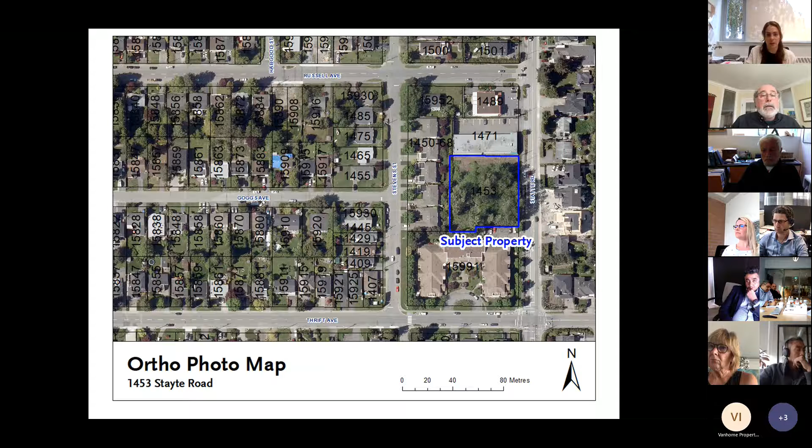So the purpose of this report is to present the ADP with a summary of revisions based on the feedback and suggestions that were received on July 20th, 2021. The proposed townhouse residential project is located at 1453 Stayte Road between North Bluff and Thrift. I'm just going to give you a very high level overview of the project because the applicant will be able to go into more detail in their presentation of the changes that have been made.

The lot area is about just over 34,000 square feet. The OCP designation is urban neighborhood. The rezoning being proposed is a CD zone. And the form and character DPA that we are focusing on today is multifamily development.

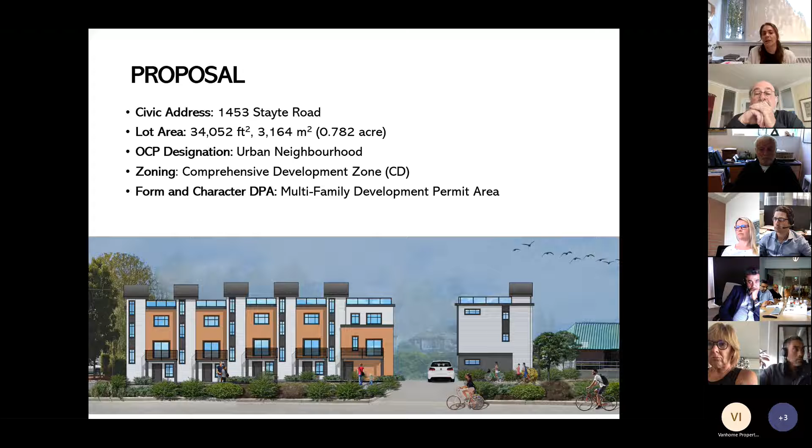So they made a number of revisions to the application, and as the chair alluded to, I summarized them in the memo to the committee. They did remove one unit to reduce the density. They did create an outdoor amenity area. They reconfigured the floor layout of block 2 of the site plan, so now there are 4 units in block 2, whereas previously there were 5. They also provided revised elevations and regenerated the shadow study.

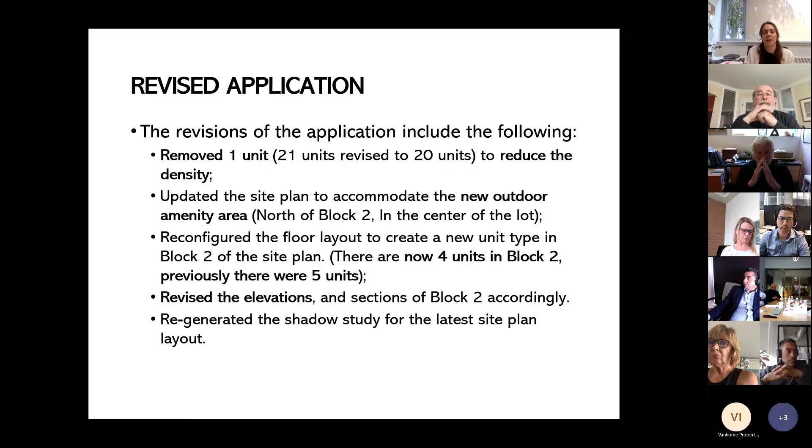So in terms of how this aligns with our policies, this property has an OCP land use designation of urban neighborhood, which is intended to build on the existing character of apartment areas, protecting the existing single-family home stock while providing opportunities for more low-scale multi-residential within walking distance of the town center as designated in our OCP. So potential developments in this area should strengthen nearby commercial uses and provide further transition from the town center to the lower town center. And the density allowed is up to 1.5 FAR.

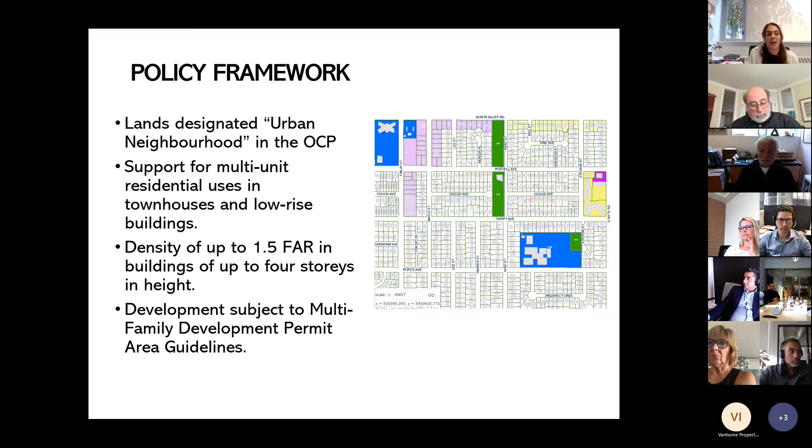So in terms of the design guidelines, the intent is to establish an attractive, comfortable, well-connected, pedestrian-oriented environment, ensure compatibility of new developments with adjacent buildings so it fits in with the current form and character of the neighborhood, enhance the overall quality of life of residents of White Rock, conserve energy and water and reduce GHG emissions, and enhance the character and built environment and public realm of the city.

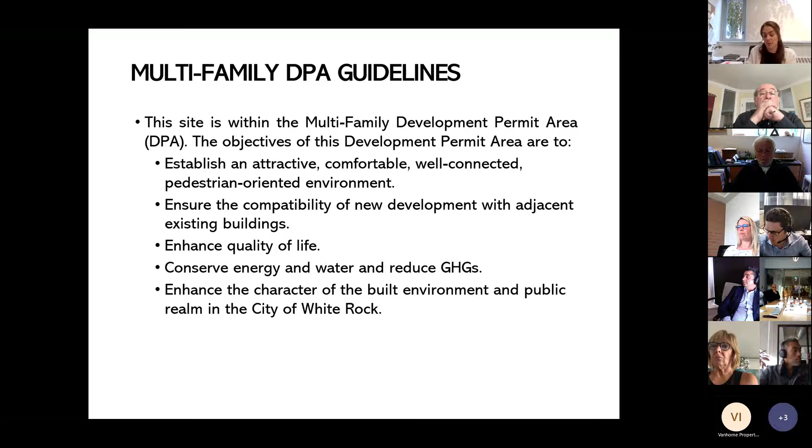So I'll give you an overview of the process. This went to a public information meeting on December 9th, 2020. The first time the ADP reviewed this was July 20th, 2021, and today will be the second review of the revised plan. The next step would be to go to the Land Use and Planning Committee.

At this time staff is looking for a recommendation of support based on the revisions. Staff feels that it does meet the intent of the design guidelines. That's where I'll leave my presentation, and I'm happy to answer any questions on the memo, or hand it over to the applicant.

Okay, are there any questions? I can't see everybody because of the screen share, that's all right. Is there anybody who has any questions for Alex? I have one, but I'll first see if anyone else does.

All right, I'll go. My question is, you say it's 1.5 FAR. Does this proposal before us today, the revised proposal, meet the 1.5 FAR? Through the chair, yes, it does.

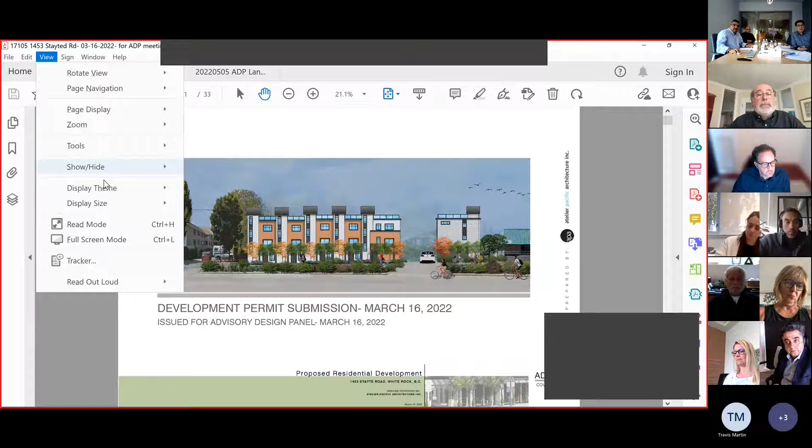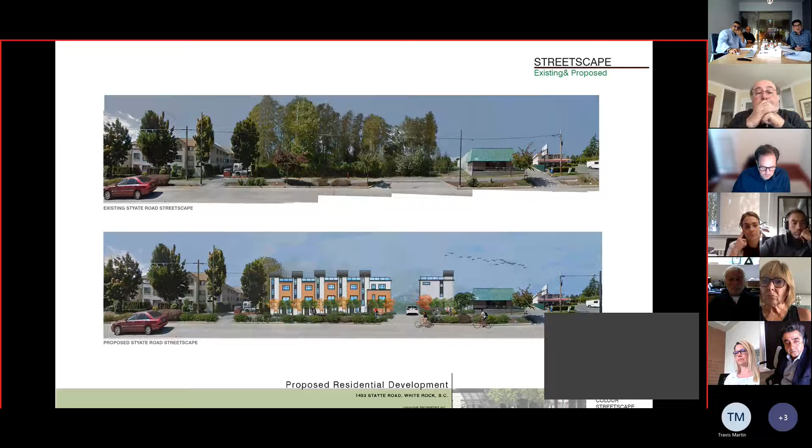Why don't we go to ADP 0.6? I think we'll just focus on the changes from the previous application, that would probably be the easiest thing to do. We did go from 21 units down to 20. I think it's... keep going... oh, back... there you go.

Okay, so I think there's a question around the FSR meeting the OCP requirement of 1.5. We're actually at 0.938. If you take the density relative to gross site, it's actually lower, 0.905. This project goes back quite a ways. It was originally a 4-story condominium building. At that time we were conforming with the proposed OCP and direction from some members of council who'd like to see an apartment project there. It was actually proposed at 50 units and 1.41, so this is substantially lower in density. Now we're down to 20 units and a density that's under 1.

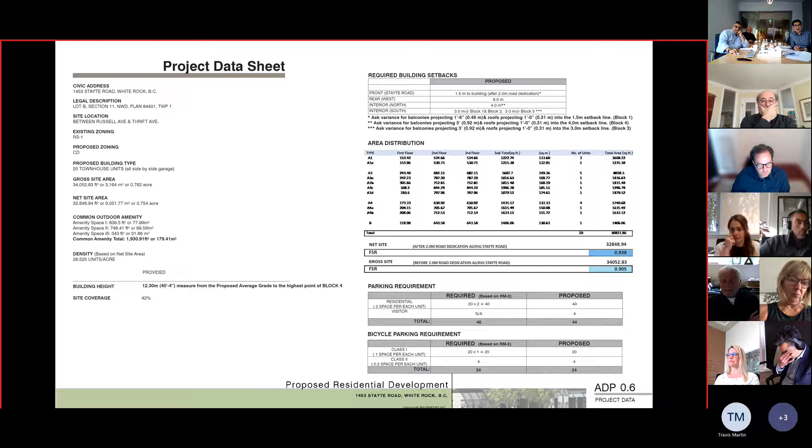That site plan there. So the big change from the last presentation is on block 2. It's gone from 5 units to 4 units, so 21 units down to 20.

I think the landscape architect can also talk about the addition of that green space in the center. We did have the green space on the northeast corner, but now we have a larger one situated in the center of the site. We still have the one in the northeast and northwest corner, so it's augmenting the amount of available outdoor space.

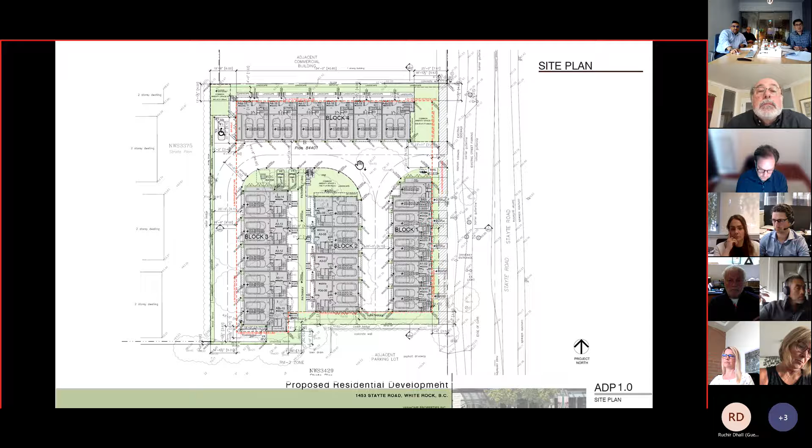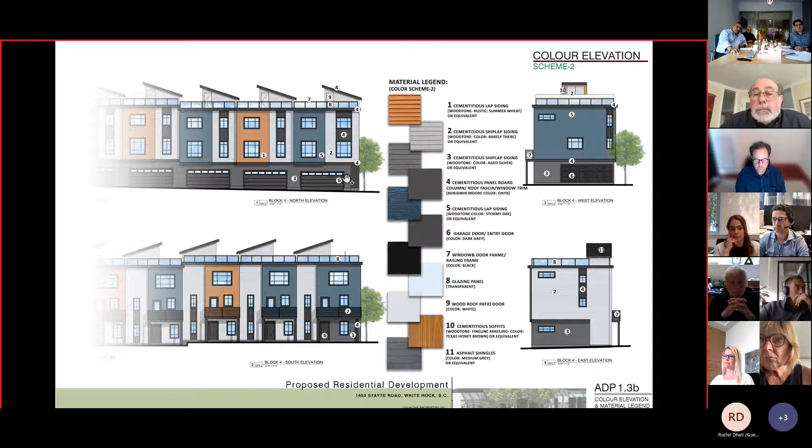Architecturally, the mass of block 2 has changed a little bit. By taking down 1 unit, they got a little bit wider, so it's a slightly different unit. The outside treatments haven't really changed. There was some discussion about increasing the usable roof area, so that's definitely a possibility.

In block 3, the neighbors to the west were looking at reducing the amount of outdoor space of the individual units by about half, and then providing a privacy screen, an acoustical barrier between the neighborhood and the units. That's how it was treated. I think in the last ADP discussion it was about expanding that space, so we can definitely do that, and then move the screen over and provide the acoustical barrier the neighborhood wants.

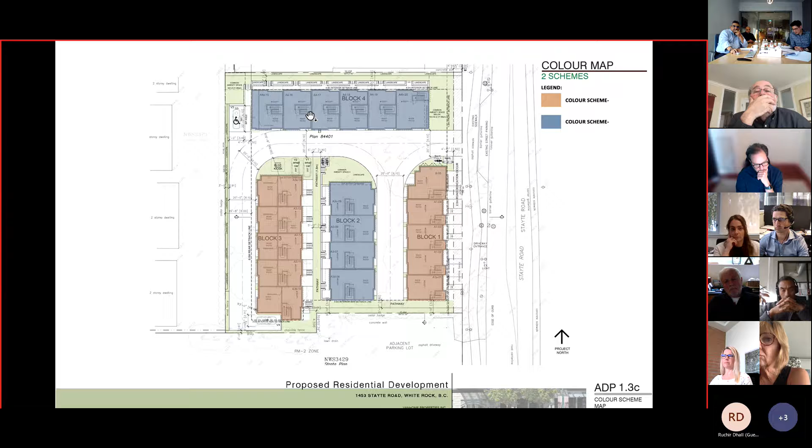That's pretty much it relative to what was done before. Travis, if you want to touch on the landscaping changes, we'll load up the landscape drawings for you. Sure thing. All right, thanks, Brian.

As noted, we now have 3 green spaces. The front corner amenity, which is basically the play area, we were asked to enclose, so we've added gates to that little space. We have the northwest corner seating node that was there before, and now that links down into this center green space node, so it's a bit more well connected through the project.

The entry driveway has this special paving, and that paving is also continued at the center node now, so it broadens the feeling of that space. With the reduction of that unit, we were able to add some seating for either people who want to hang out or just take some alone time.

We're also able to fit a larger tree. We have two focal trees, both pin oaks on the project, which will govern over the space and provide that central green feature. This is also where we have our bike parking and visitor parking at the end of this pedestrian walkway, which accesses the houses in blocks 2 and 3. So that's the big change in the middle of this site.

At the last meeting there were a couple questions, so I should clarify again. Along the frontage here, we're meeting the setback requirements. However, the road may be widened in the future, so we've ensured that all of our landscaping is sitting behind the potential new property line, which has a 2-meter takeaway on the front edge. We have fastigiate trees and layered planting there that'll provide a nice landscape base along the frontage.

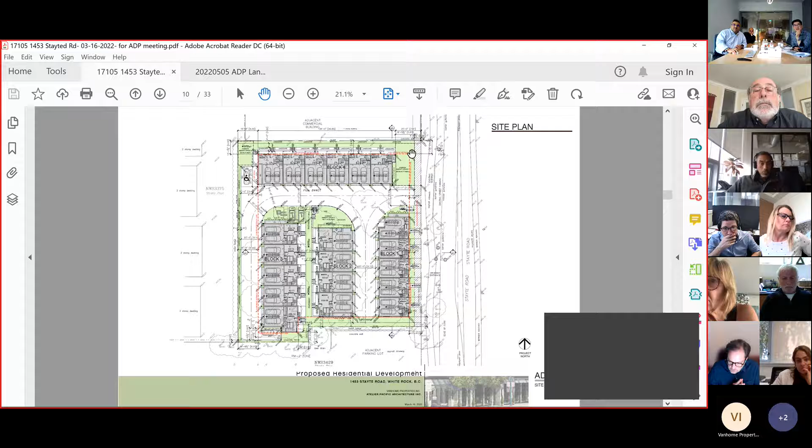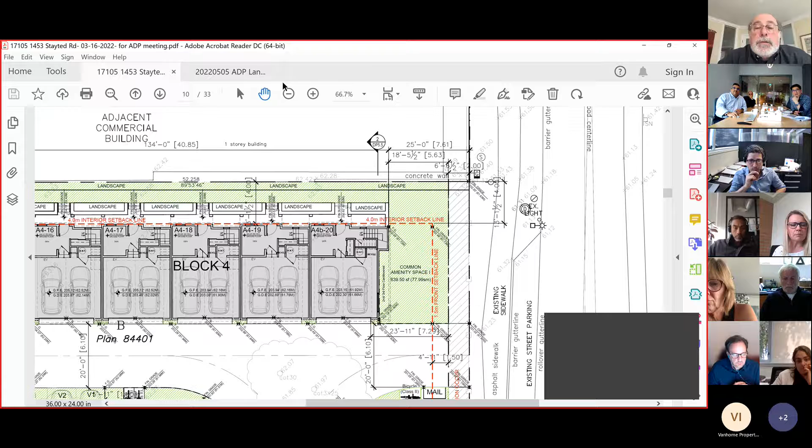Okay, so the road right of way, the 2 meters, goes to the red, or halfway to the red? Can you go to the architectural site plan? I believe that's correct. It goes to the red, the area that's hatched on our drawing. So you can see the front setback of 1.5 meters, and then the secondary middle dotted line is the right of way. I understood that on this design, but could you go back to the previous one? There, just for clarity, I don't know where the 2 meters is. The 2 meters include the red hatch. The diagonal hatched area is within that 2 meter zone. So the line aligns with the red dashed line.

Okay, I'm going to come back to that with a question, because we have a design with and without the right of way being used. Any other questions? Has Ruchir come back yet?

Could I ask, is there a way of seeing perhaps Alex or someone - I don't know if one of the staff members could email him and see if there's... I can send him an email. Okay, if you could do that, I'd appreciate it.

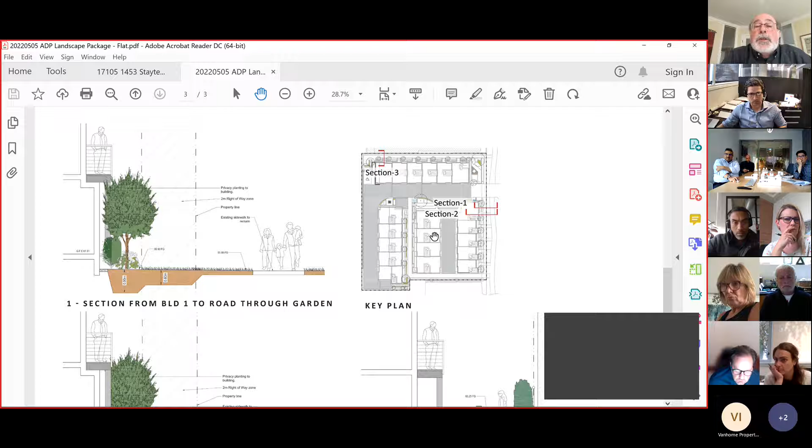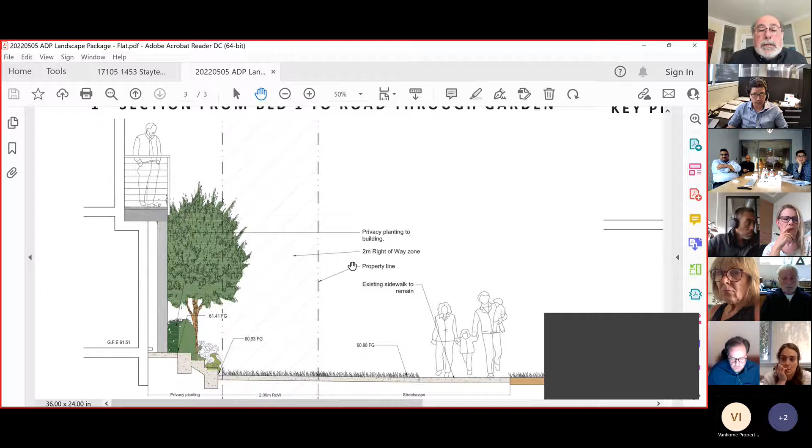Section 3 is the north property boundary. No, not the cross section - section 2, rather, section 2. That's it. So could you move that up a tiny bit? Section, so that we're all on the same page about... sorry, the reason I have my controls... that's much better, thank you.

So the property is the fence, and I've looked at this site several times. Is the fence that's there now on the property line?

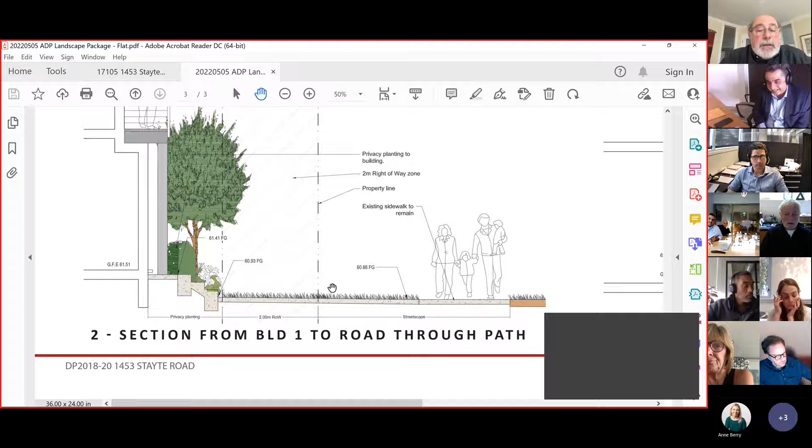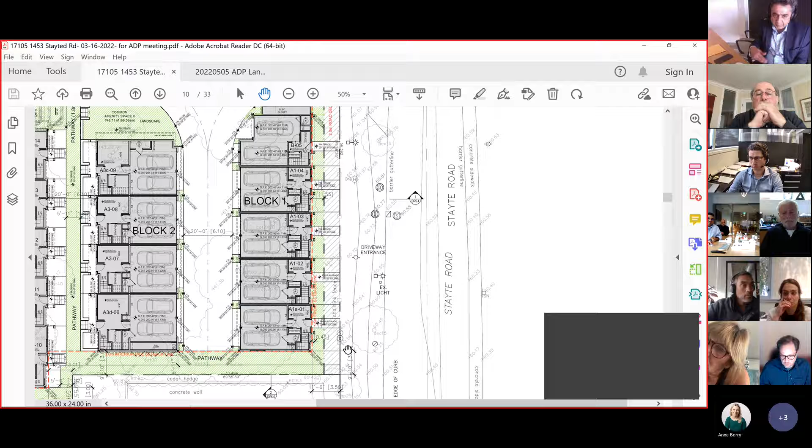I have one question, and if you could lead me to the site plan, especially if you do have an off-site site plan - we had a little concern last time with that. On Stayte Road, there's an elaborate boulevard and some existing inset parallel parking spots, etc. Last time it appeared that civil input was not available - actually we did not know how the outside of the site is going to look. I was just looking forward to seeing if we had more information this time, where the curb, the boulevard, the planting, the sidewalk, everything, where the fencing is, all that stuff, and what kind of planting, hedging, etc. is towards Stayte Road.

Sorry, unfortunately I didn't prepare for that. There are civil drawings - the client could probably speak to that as well. It's part of the offsite servicing agreement, which includes curbs, sidewalks, and that sort of thing, but I don't know if we can access our server to get that drawing.

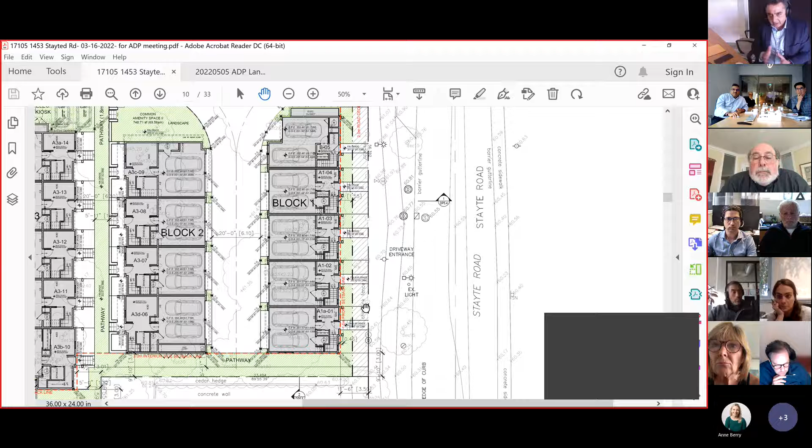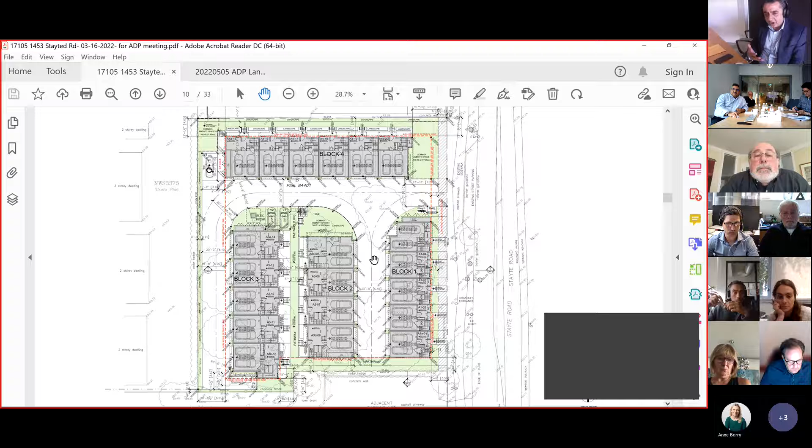Okay, I just wanted to basically get a feel of how the development is going to look from the outside - the treatment, the interface. Is there going to be a shrub, a sandwiched fence? What is it going to be? What kind of trees, what profile of the curb, etc.? I believe we talked about it in the last presentation as well, and I was looking through the package to see if we got more information. In your rendering, from the front you see a bunch of shrubs and stuff, but I'd like to know more how the project looks from the outside.

Yeah, unfortunately, I can't access it.

I think that curb path, the multi-purpose path, because if you see the path where your cursor is, it doesn't look like a civil kind of layout. It's irregular. It probably seems to be either an existing asphalt profile or something. I don't see where the boulevard, the parallel parking spots on Stayte Road, the way they are, etc. So if you can continue looking for it while we work through the presentation, maybe that's a good idea.

And this is also just building on that, and I think maybe the question is to Alex or Anne. Is there a development standard or a future cross-section that Stayte Road is aspiring to? Because right now it looks a little bit fictional, or it's really predicated on Stayte Road not meeting its full development potential. So does the city of White Rock have a cross-section that we can refer to? Will there be bike lanes, for example, parking? What is this particular road classification, and what would it yield in terms of cross-section?

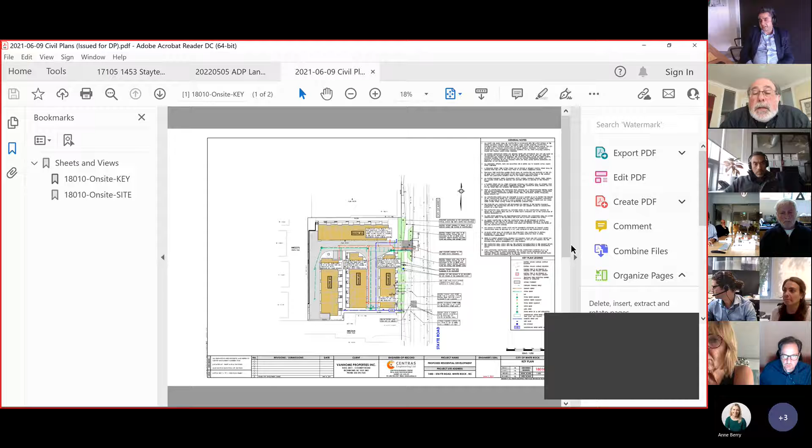Are you? Is that your? You can see the. Can you see those drawings? Yeah, you can just go to Google and Google Maps and 1453 Stayte Road, and yeah. So we've got the civil drawings for you. Sure. So I don't know if you can see the screen now. Yes, thank you.

So this is the existing condition with the existing sort of wavering asphalt which is going across, which is a sidewalk, which I think is a multi-purpose one. I can even open up Google and maybe share that for you. Yeah, that'll be great, because I see a rollover curb and a parking in front there.

There's an indentation for about 2 parking spots now on Stayte Road. Yes. That would, if there's no widening of the road, in other words, then those parking spots would be lost.

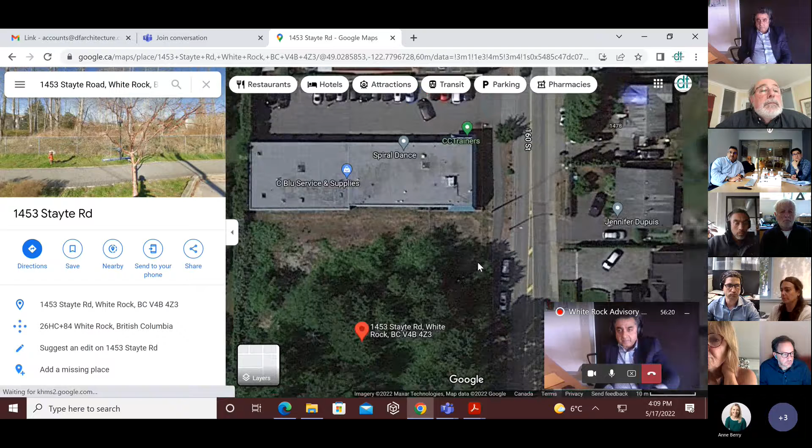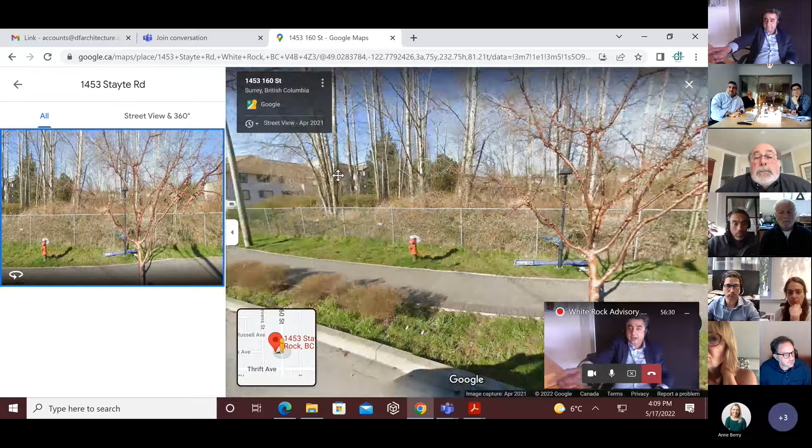Yes, if you can go on that image, just the image on the left. Okay, that's right, so you can see this. That's the one. If you just scroll a little bit, other side. That's what we're talking about. Yes, and that's where the entrance would be to the driveway in. Correct.

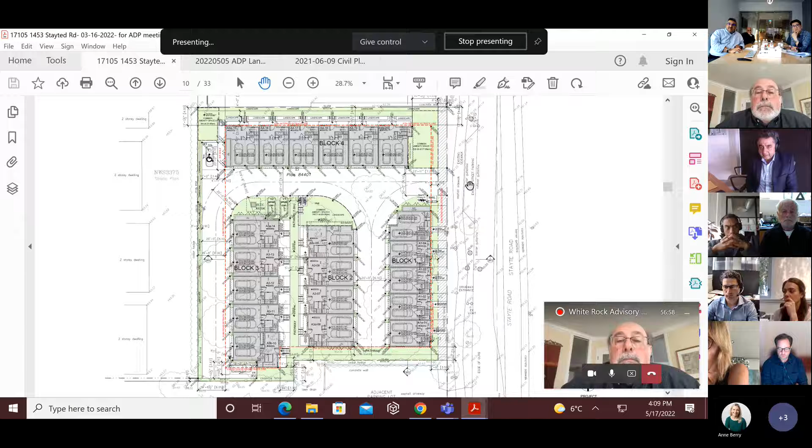So if you see this, Rucha, just to get you an idea, what we've done is, in our architecture, you see this is the lay-by. This is the 2 parking stalls here. Yes, and it's going to be eliminated to give an entrance to the development.

Sure, so basically that would be revised later on. But right now that's the current condition, and we will be taking an entrance over there. So I don't think these offsite parkings would remain in the future. Sure. Okay, and if we can quickly bring on your screen the civil layout once again, which you just showed.

So that's what he says: existing parking layout lay-by to be removed, install topsoil and sod boulevard. Is there another profile in which the curb profile going south is shown? Not really, no, not really. Okay.

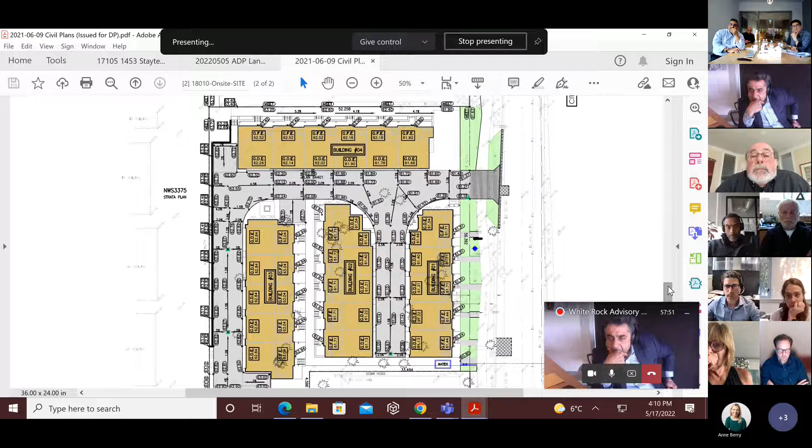There were comments about what this road is classified as, and it's classified as an arterial road. And through the rezoning process, we would refer out to engineering, and this would be something that they would deal with at that point through their works and services agreement.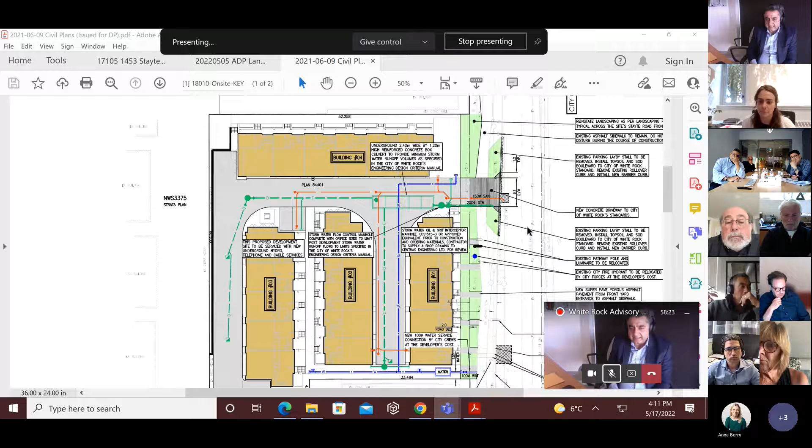I would propose if we let Travis talk about what he's proposing in terms of where the yards end, where it meets the boulevard, where the asphalt sidewalk meanders and all that stuff. Yeah, is there any planting, hedging, etc. and how is the treatment of the property edge handled?

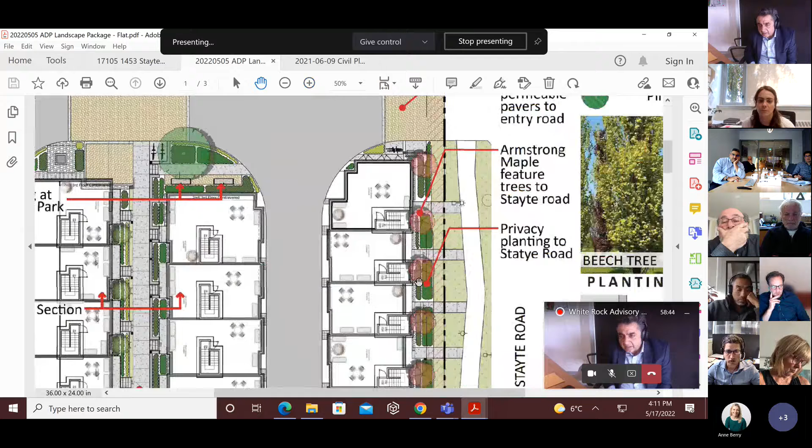I think it's important to realize that right now we seem to be planning for the existing condition, which is that this multi-use path stays in place and the boulevard stays in place and gets expanded around the driveway entry. But my understanding is, correct me if I'm wrong, that it's possible this road will be widened in the future, which is why we have this 2-meter wide right-of-way shown in that diagonal red hatch. So we're planning to have 2 layers of planting along the front of the building, a lower layer and a back layer of evergreens to give a nice landscape treatment to the front, and also have our trees planted within the 1.5 meter remaining frontage when that would happen. At this point, we have a 3.5 meter setback from the property line to the building face.

Brian, I'm not sure if you have anything you'd like to add to this.

We have pathway connections to individual units going into the multi-purpose path, but I suspect eventually, if the road does get widened, it'll be just a straight municipal sidewalk running along where the service right-of-way would currently be.

Sorry, because of where your mic is located, I didn't understand the last few words. Could you show with the pointer, with your cursor, where the right of way is? I know it's the 2 meters right there, right there.

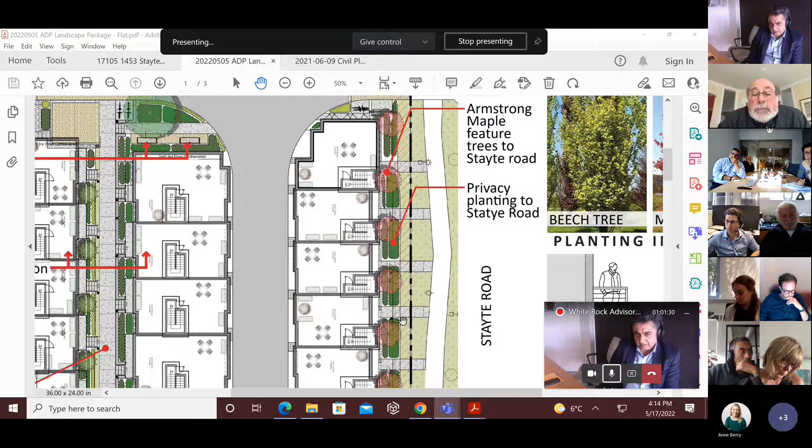Yeah, still a little unclear how that treatment is going to be. For the time being, is there a fence proposed there, or?

I think, Rashir, did you miss this part of the presentation? Please switch to the next page, one after - possibly one page over. We have a section, sorry, the 3rd page, one more down, that shows the frontage here. Essentially, in these 2 on the left, you can see we have 1.5 meters with 2 rows of planting along the building face, and then the 2 meter right-of-way there - it could be back boulevard which could be planted, or it may be a public sidewalk, all determined by the City of White Rock in the future.

Yeah, I see that, okay, thank you. So basically nothing has been thought about how the treatment of the interface is going to be, deferring to the right-of-way situation, which is unclear at this time.

Okay, thank you. A quick question to the city: is there a type of treatment - the planting, the boulevard trees, etc. - that we have standards on, especially when we have multiple yards opening onto street-facing units like this one? Because we don't see any trees or anything, or what the spacing or species of those trees are going to be.

Through the chair, I can't speak to species in detail, but we do have tree planting specifications, and everything would be done under the guidance of our city's arborist.

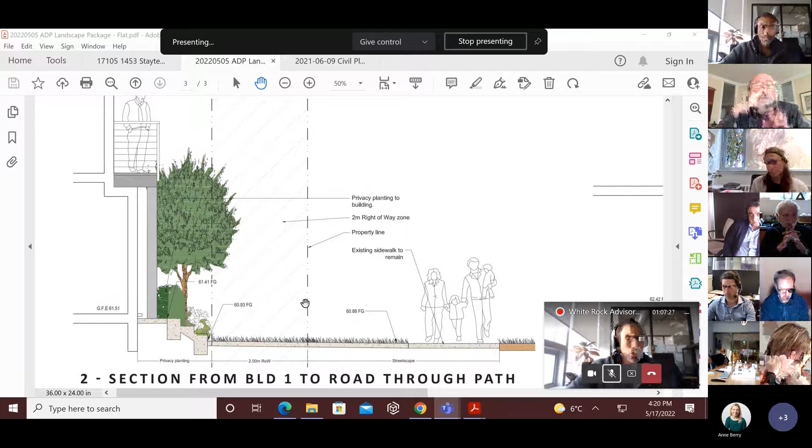Yeah, thanks, and I assume it's on this topic. It is. It's not really a question, just to throw in a few words. I think some of the complexity with this particular arterial, if I'm not mistaken, is it's the demising arterial between Surrey and White Rock, right? So typically when we're looking at jurisdictions or roadways within singular jurisdictions, it's more straightforward in terms of development standards. Here I can understand it's going to take cooperation between municipalities, which is probably leading to some of this ambiguity in development plans for that road. Just an observation, thank you.

Paul? Yeah, I just wondered about what kind of tree you'd be planting in that little setback. What is it, just over a meter?

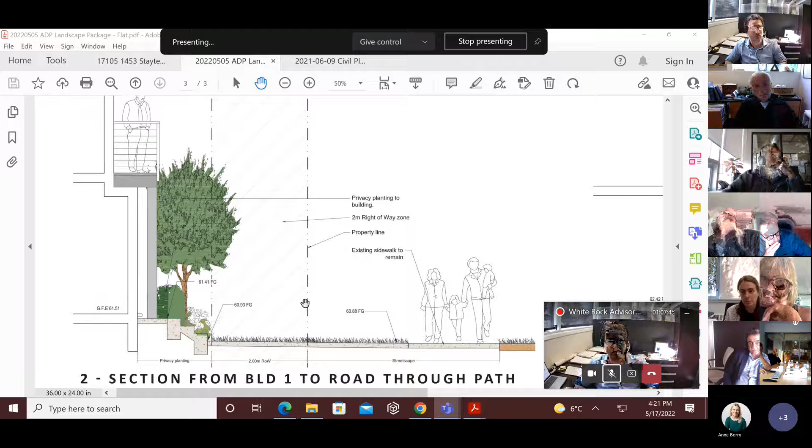Yeah, so we're planning on Acer Armstrong. And how big do they get? They're quite narrow, tall and fastigiate - more narrow than this kind, more long and tall. They'll get 20 feet tall, and a tree that's very old will possibly have a 10-foot diameter, but generally it takes a while to get there. Due to their structure, you could easily be limbing out branches to give it the shape you're looking for as it grows over time. Even just next to my building here, I see it on the street - it's very common to thin out the trees as necessary, but this is one of the most fastigiate, durable, tight trees, and it's a nice maple too, so it does well in harder conditions, has nice fall color, things like that.

And one other thing, the image tends to be a little off-putting, but the other question I had is some of these steps going down to the units create a drainage issue. Is there some way of dealing with those sunken areas between the slope and the building itself? A very narrow, what looks like a very narrow well. There doesn't seem to be an indication of how that's dealt with architecturally.

Yes, through the chair, they will have individual drainage to ensure each area is well drained. To the chair, are you referencing section number 3 between building 4 and the northern property line? I'm sorry, I don't know who was making that comment. Telia Pacific Architecture, just asking if you're referencing section number 3 on the landscape drawings, where there's steps down from an upper walkway. Yeah, for the lower areas there will be area drains, and then perimeter drainage as well on the basement of the foundation walls. But the surface water will be taken away by area drains. Okay, that's all I needed to know.

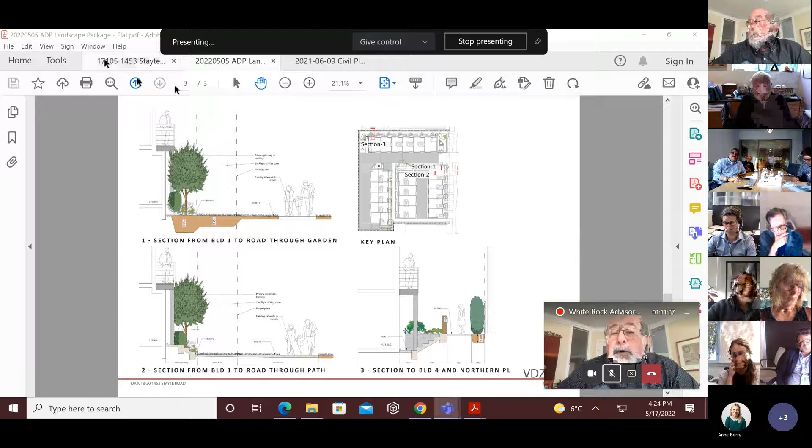So is that something you would know now or could easily get? Without knowing the planning, at least knowing the width of that area. We could check with the project civil engineer to see if they've had discussions with the engineering department, but I don't believe there has been to date. They were asked to design it to the existing condition, which they've done, but in terms of the future shape of Stayte Road, I don't think they've had that feedback.

Yeah, I wouldn't expect a design to be done, and not only that, but you have the building to the north of you already there, probably getting close to that 2-meter right of way. But let's move off that, because I don't think it's questions anymore right now. I've got other areas of questions. I'll go through a few.

Could you go to the north side? Zoom in on the north walk. I'm seeing various numbers in a few places, but I think it's now a setback of 4 meters between - that's what it shows, 4 meters. I want to confirm that because I saw some other numbers somewhere that the setback from the property line is 4 meters. Is that correct? I want confirmation. That's correct.

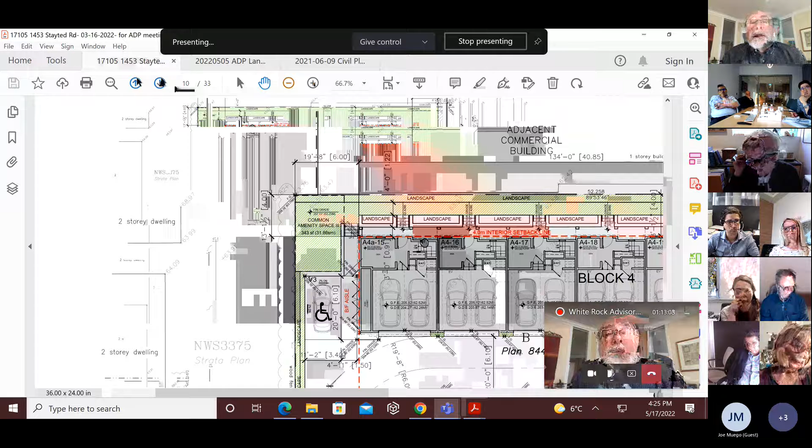Okay, so within that, there's a cross section. Could you go to the cross section? I think it's cross section 1, perhaps on a different drawing. I'm not sure, it may be the one you were looking at before. I think you're referring to section 3 in the landscape drawing, bottom right corner. Section 3, yeah, let's get that.

So that doesn't quite add up to 4, but I'm not going to quibble. There's 0.75, 1.2, 1.49 - let's say 1.5 - and 0.9. It's not quite 4, but it's a lot more than I had understood last time. There seems to be some inconsistency, which may add up to half a meter or so. Just a comment. Here's my question.

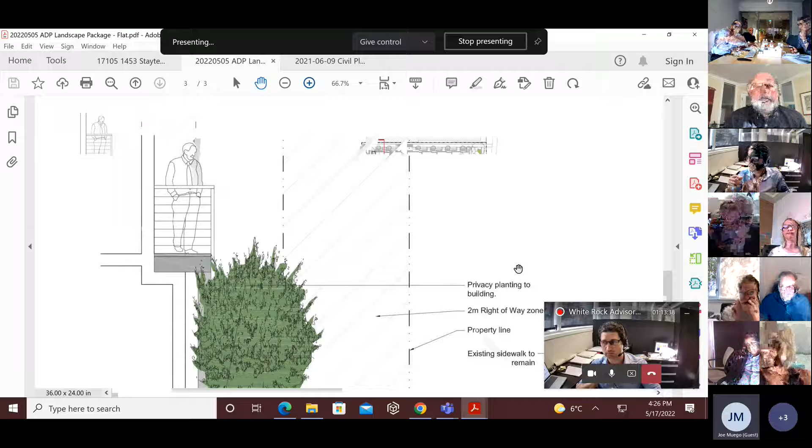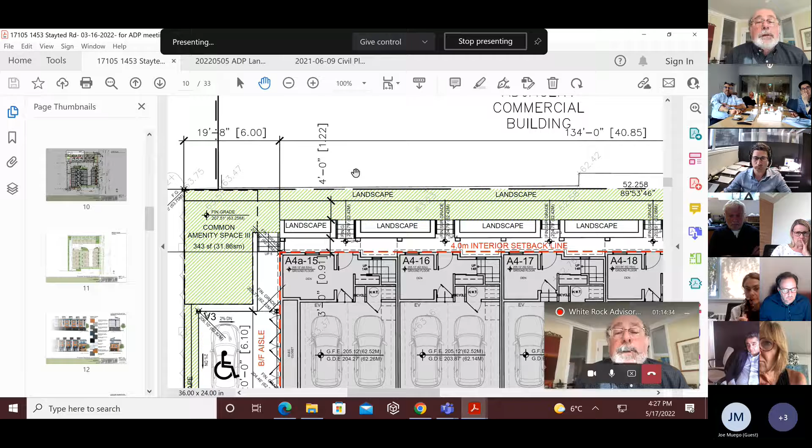My question is, the design guidelines require walkways to be 1.8, and this is 1.22. This was raised in the last July meeting. You're trying to squeeze an awful lot in there, and this is a question for you and maybe our panel members: what is the significance of the difference between 1.22 or 1.2 meters for the walkway, the sidewalk, versus the design guidelines that say minimum 1.8? Is it a wheelchair issue? Two people can't walk together. Why 1.8 and only giving us 1.2 or 1.22?

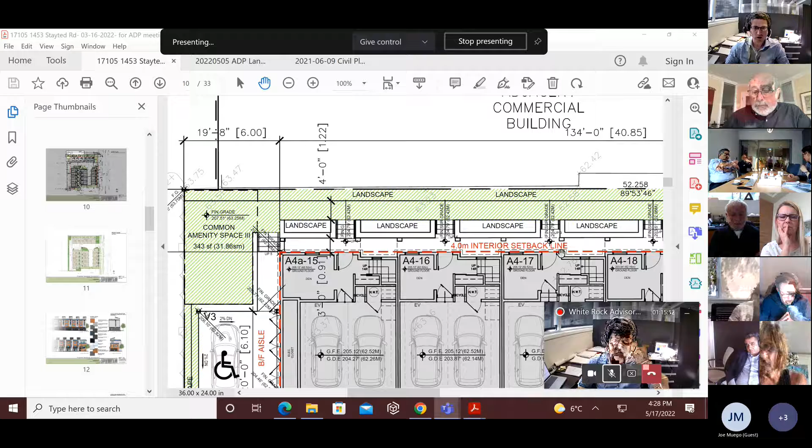If I may answer through the chair, I think 1.8 is ideal, and it allows wheelchairs to pass both ways. In this case, this isn't a wheelchair accessible building type, so that isn't something necessarily to accommodate here, but it is a guideline and we're working to meet guidelines where we can - it's not a zoning bylaw technicality to meet 1.8 meters. We've met 1.8 meters on more busy walkways along the south and through the center walkways within the project. But in this case, we felt it's more important to provide a bit of greenery and an acceptable walkway to these few units, which will have very minimal traffic.

Okay, I'm not surprised by that answer because you've got squeezed space. That space is at a premium here, and that's one place you could take it off.

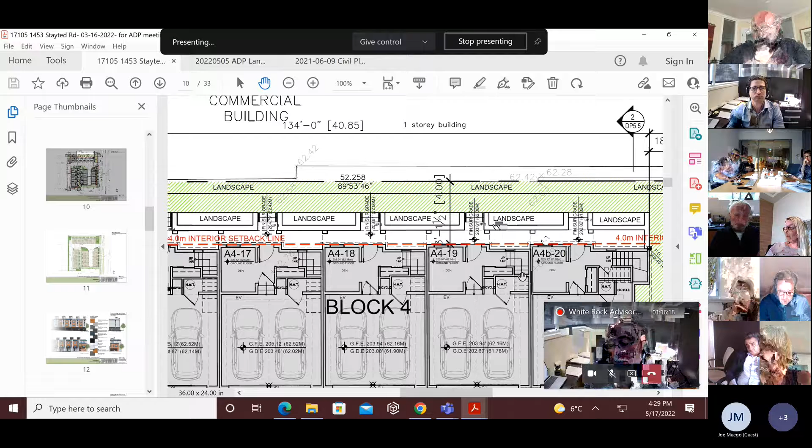But now, to add to that issue is your landscaping or hedges. The design guidelines specifically say not to put hedges, section 22.6.2F: the planting of hedges directly adjacent to sidewalks is discouraged unless they are for screening garbage. So maybe it's for Rushier or others who do these types of designs. I presume you don't want hedges there because it makes it more difficult to walk along. And when you've got 1.2 meters and a hedge, does that constrain you even more?

What, do you want me to say something? Well, I'd like an answer, I guess, from the applicant, but I'd also, if Rushier has a view on this, I'd appreciate it.

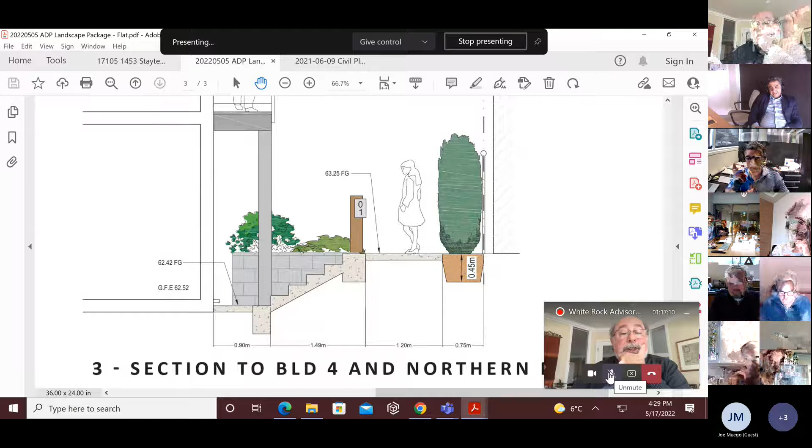Yeah, I don't see a problem here. I would like to have a hedge here. It's a property which abuts another property and a building rather close. Don't get me wrong, I think the hedge is correct. The question is the hedge in combination with 1.2 meters - is that a problem?

It's not an accessible path of travel anyways, so 1.2 should be fine there. And so long as the strata maintains the hedge, I don't see a problem there, either in the hedge or the sidewalk being 1.2 wide.

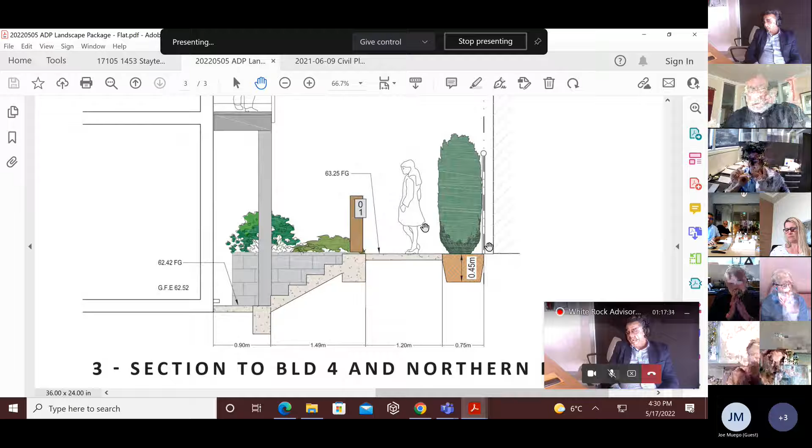Okay, that helps me, thank you. I'm sort of getting confirmation from another panel member. So now I'd like to go to the parking issue.

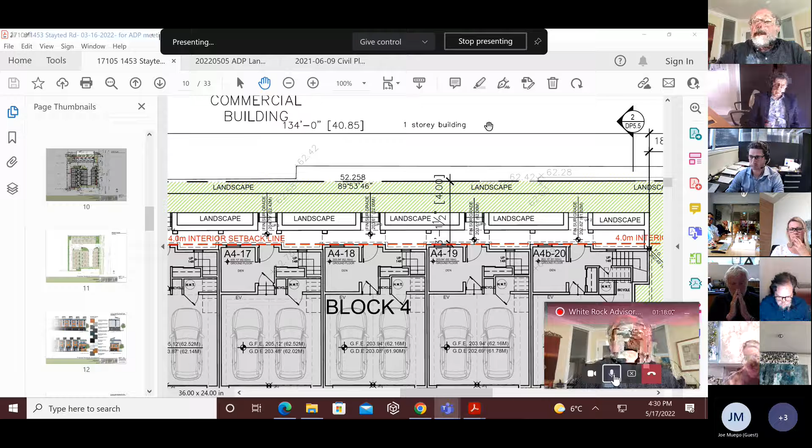The visitor parking - I know there's no formal requirement for number of visitor parking spots, but it's still an issue for the design panel. So if we can go to your site plan, zoom out a little bit - yeah, that's perfect to begin with. As we've talked about, without widening Stayte Road, visitors on street - the only on-street parking would be about those two, and those would be lost. There's no on-street parking on Stayte Road.

So visitors would have to walk a great distance or go into one of the four. I'm telling you my interpretation, and then I'd like your response. They would have to go into four parking spots, two of which - one is handicapped, the other two are for small cars only - and the fourth one is down on the bottom left, which is sort of a hidden space, and when somebody's driving in, they won't even know if it's available or where it is. So my question - I'm sort of verging on a comment, but I'm trying to follow my own rules and ask you a question - is why do you think that's sufficient?

That issue was raised last time. There's been no change. Why do you think that's sufficient? Where are visitors going to park? I believe, when I say visitors, I'm including service vehicles.

Yeah, I believe we are trying to meet the requirements of the zoning bylaws, where we have 0.2 parking spots per unit. We have 20 units, so we provided 4 visitor parking spots as per the requirements. I understand your point about having 2 smaller car parks, but I think that's the only leeway there is. In actual fact, I believe there's no requirement for visitor parking stalls in the bylaw, but we provided 4.

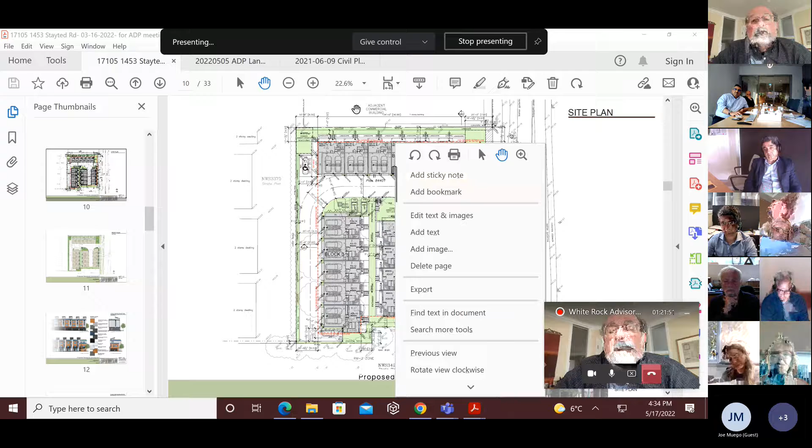I'm sorry, where could you zoom in on - give me an example of where somebody could park?

Yeah, but they can't park there. Where the indicator is, there's a bit of a driveway apron in front of the garage door, but it's certainly not wide enough to fit a car. If you did park a car parallel to the garage door, it would actually protrude into the asphalt area.

Well, you know, this is a strata, it could work out where if somebody's got a visitor and they pull over, if there's room for somebody to parallel park in front of a garage. It's not ideal, but sometimes stuff has to happen. It's long enough to fit a car, but you'd have to jockey it in there, and you'd be cutting into the width of the strata road available. So whether or not people actually do that...

I think another thing we could do is give some signage indicating the visitor stall at the end of the drive aisle. I know it's a little bit tucked out, but that could be put in so visitors could easily find that. Maybe a wayfinding sign indicating where the visitor parking stalls are.

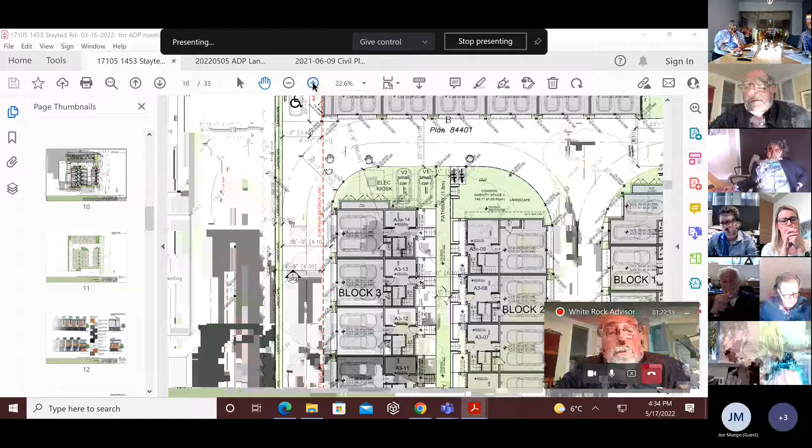Chair, while your concern about parking is very valid, a couple cars are not going to alleviate the situation of such a dense development. But what can the designer do? If the bylaw doesn't cater to it, they've still gone over and beyond and provided a couple spots. There's not much more a designer can do.

I don't know whose problem it is, but this is a genuine problem. I understand probably the additional parking spots would be more valuable in this situation even than the common amenity space provided. But it's not the designer's fault - they've complied and gone beyond, providing more than what was asked for.

Okay, so this is a bigger question. Let's not get into a disagreement within the panel right now - these are questions, let's go down to the bottom. Is there - the bottom left, Paul, I'll get to you in a minute - the bottom right, that spot, how would a car pull in and turn around there?

So we have given extra space than what is required. We've got almost 2 feet additional, if I'm not mistaken, for a car to back out. I know it would be a 3-point turn getting in and out, but there is additional leeway space given at that corner. Sorry, I haven't - your sound is not clear to me.

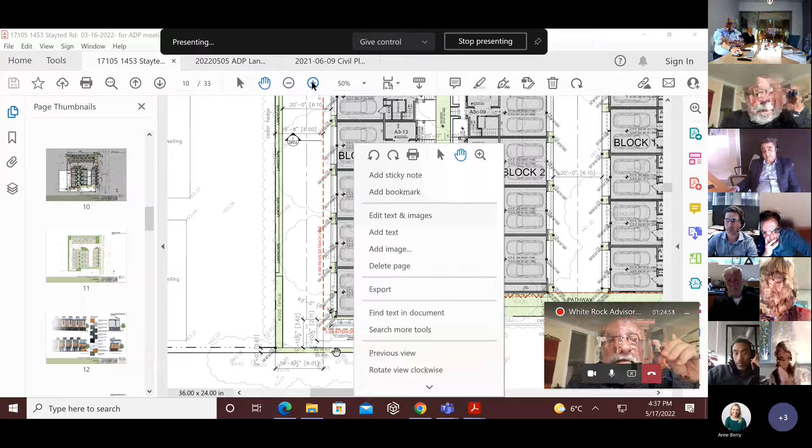Yeah, the parking space is wider than the requirement of the parking bylaw to help the maneuverability of a car. I think Zuba was pointing out it'd be a 3-point turn, almost like a hammerhead, because it's 11 feet from here. Yeah, so you can see it's actually wider. So you can confirm that it would be? Yes. And the client did actually have a traffic consultant review it at the very beginning - two things: one was the visitor parking stalls, but also for garbage pickup.

Okay, but I will comment though that if somebody is parked there and another car comes down in order to park and it's already taken, they have to back out. They can do a 3-point turn because you've got a little bit of an apron in front of the garages. The strata roads are 20 feet, so yeah.

Okay, alright, thank you. So that's it for my questions. I want to - there's some hands up. I'll go to, I guess, Alex or somebody else.

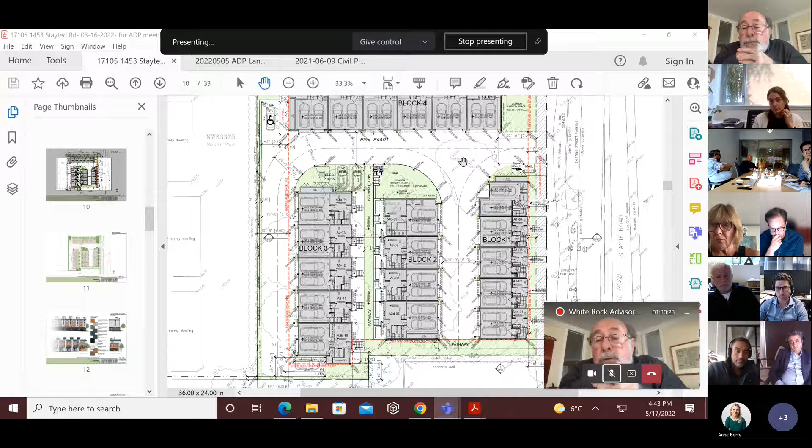Thanks, Bill. Firstly, I would like to commend the applicants on being willing to reduce the number of units. I think that did make a difference in the end in terms of a little bit less site coverage, a little bit more green coverage. So thank you for that. At our last meeting, we had some concerns about the proximity of block 2 to block 3, privacy issues. Thank you for your cross sections, it helped alleviate a lot of those concerns.

We've been so fixated on parking and site, we didn't really talk about the building. Could you please just put up an elevation so I can speak to it? There's no questions, it's just— there you go.

I would also say that the presentation is quite nice. I would have also appreciated, since you have a computer model already, some perspective views to really get a sense of the massing. Everything projected orthogonally to 2 dimensions doesn't really give us a sense of how nice a development might be. So something to think about, including roof entourage. It's always understated - you're showing 3-foot or 3'6" guards up there, but we know there's going to be umbrellas and all sorts of other things up there.

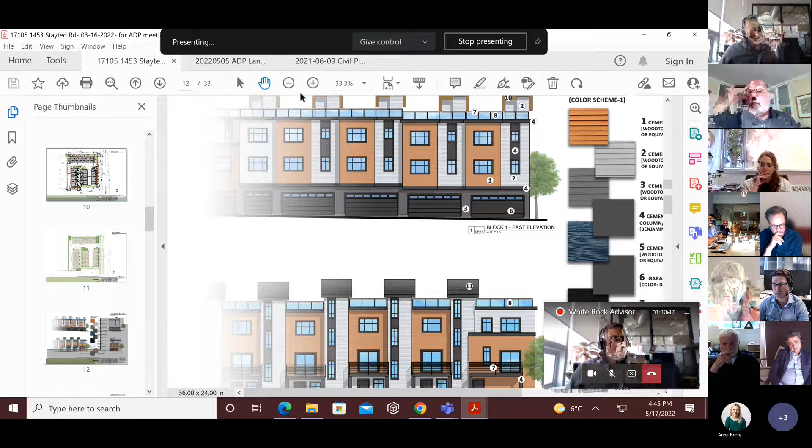My last comment is nothing other than just an idea. Faye had mentioned concerns earlier about the common amenity space of the playground being on Stayte. One could just take block 4 and slide it forward to a similar setback as block 1, and move the visitor parking beside the accessible visitor one, so you wouldn't have a dead end there. And then put the amenity in the southwest corner - basically switching, you follow what I mean, that top block.

Yeah, that's what - it would just shift over, and then you could have two visitor parking spots side by side and nothing really changes. But I'm not designing the project, that's for you guys to consider. Overall, I'm pleased with where it's gone from where it's come from, and I look forward to the others' comments. Thank you.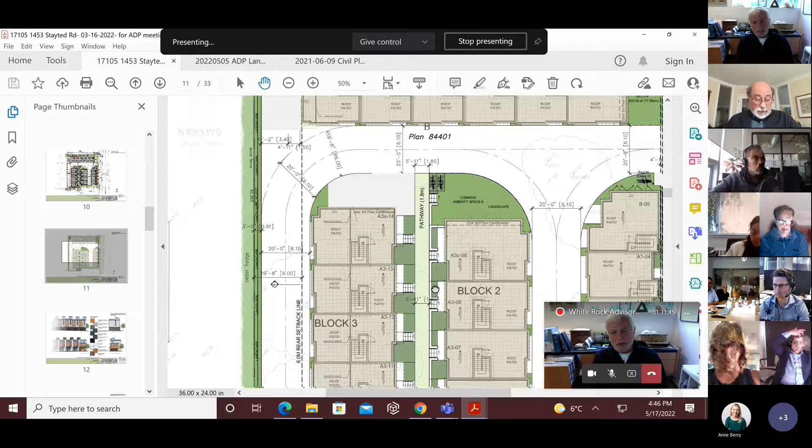I agree with all of what Joe has said, and in addition, as far as the roof terraces are concerned, I would like to see some sort of privacy screening between units, as you don't know what your neighbor is going to do next door in the way of umbrellas and other paraphernalia. Also consider the slope of the stairway roofs, as one area slopes onto the area of the other, so there are some drainage issues. Roof terraces are a tricky thing to deal with architecturally and physically, so a lot of attention needs to be paid to that. But the issue of privacy, I think, is important.

To me, the rest of it, I'm really glad to see that the units have improved quite a bit over the last presentation. Thank you.

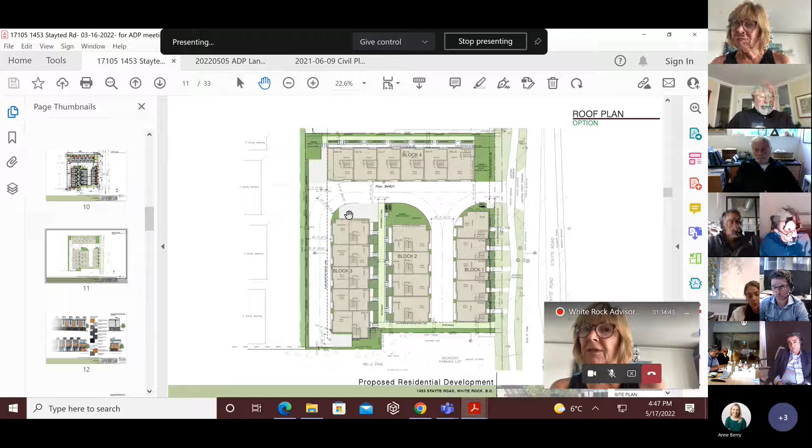I dread to think what's going to happen on garbage day at 8 o'clock in the morning, or 7:30, when everyone's back and their car's out trying to put the garbage out, etc., and pulling onto Stayte Road. It's a very congested area.

Stayte Road, the other half is Surrey, so it's a very unique area in that the one street is half and half. So when you get into looking at widening that road, I don't know if White Rock will be assuming all the costs. They're certainly going to need to collaborate with Surrey about that, because the other half is Surrey. There should be some collaboration, because it does impact traffic control. I know it's not going for approval to Surrey, but in terms of the number of traffic issues in that area on Stayte Road, there should be some collaboration regarding Surrey.

I do have concerns with the little amenity park being at the front of the development. You've added the gates, so that's good. I agree with Joe, I think it would have been more feasible to shift everything down. That's all. Thank you.

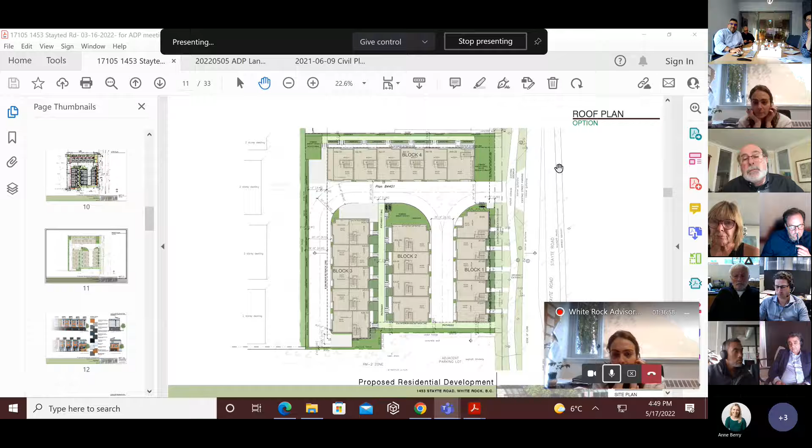Yes, hello. We would like to do that, but we do need car stacking spots. Generally we can't get a unit that close to the property line and have somebody come in to their unit or come out of their unit and then also leave the site. So that's the reason why that particular building block is pulled back, I think it's 6 meters from the property line. We need a spot for the cars to stack up. You're going to create a bottleneck if you have a unit coming all the way up front. Yeah, it's a transportation requirement that you need.

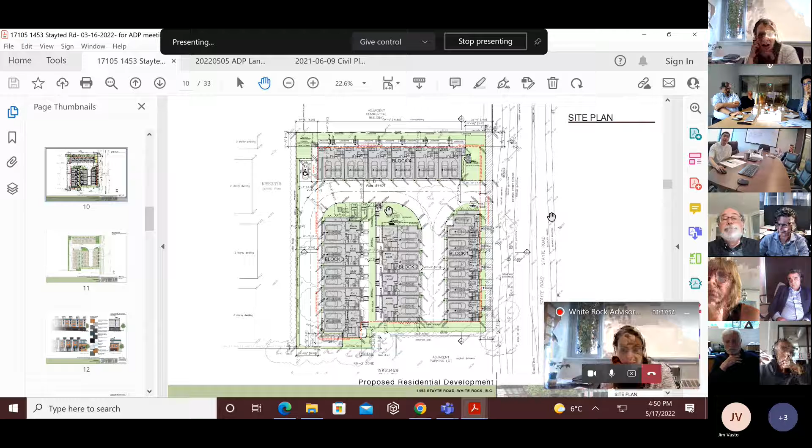Yeah, that makes sense. What about the middle area, to relocate that children's area? Yeah, I don't know, Faye. Joe, is that a better place in your mind? Because they need the stacking space.

Well, the middle area, everybody can see it, for one, in my opinion, right? Like the way it's almost hidden at the front, you're not going to have much visibility. Mind you, like I said earlier, it's more of an area for very small toddlers.

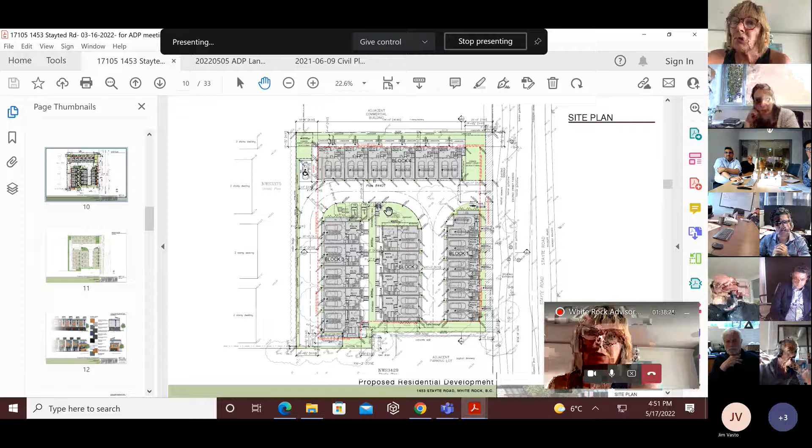Let's not try to solve the problem right now. Let's make sure we might come back to it, because we're not going to solve it here. The question is, what do we do with it? But the issue's been raised.

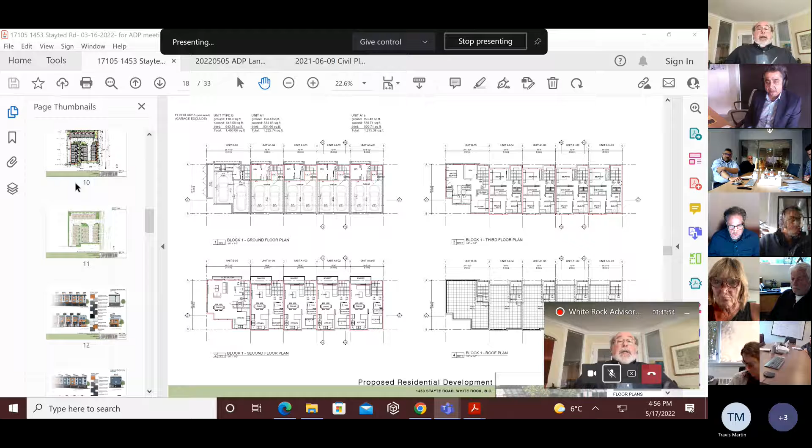Thank you. Has everybody spoken with their comments, or at least a first set, until me? Okay, thank you. We are getting to the 90 minutes, but that's not a hard rule. We'll take the time that's necessary.

My comments: certainly the main change was taking away one unit in block 2, and that helped address various issues, and I got clarity about some other issues I had before. But fundamentally, it's Stayte Road and the setback we're told as a panel to focus on. I will say I like the design of the buildings in terms of palettes and things otherwise. But the whole thing, including the very limited setback on Stayte Road, has been forced by the number of units trying to be put onto this site.

We're told to focus on the design guidelines, and I take that seriously, and not worry about some of the internal things—what's the form and character, how does it fit within the neighborhood, the design guidelines.

That's our main task as a design panel, at least that's my interpretation of it. And we've been told to do that, so I'm going to do it.

Looking at guideline 22.6.1A.B as a design guide, there are very few numerical guidelines, and one of them says to set buildings back from the property line at least 3 meters to provide enough space for gardens and shade trees in the front yard. That's for multifamily. This is multifamily, and it's not doing that.

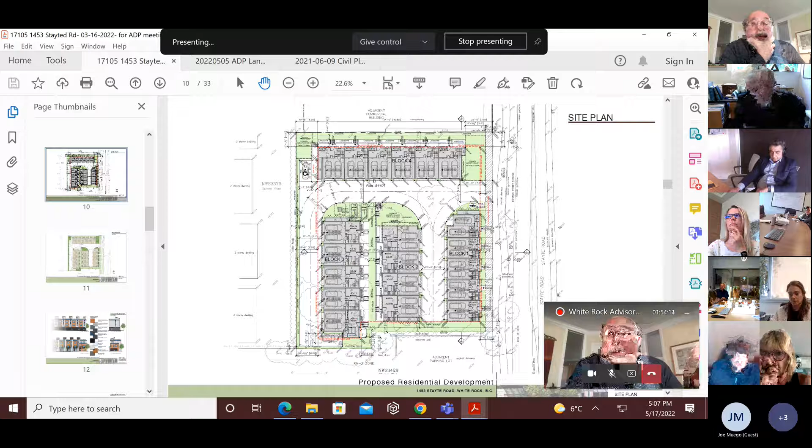Anyone else? But I would want to go back to the two. Is there any other issue other than those that are driving people in terms of how they feel this should be, what our motion might be? I hear Faye, and I have some concerns about the playground and the setback on Stayte that several of us have mentioned. Is there anything else? I'm not going to mention parking. Okay, you're happy? Okay.

Anybody else? So those are the two main issues. Okay, so what's the resolution about where do we go in terms of a motion?

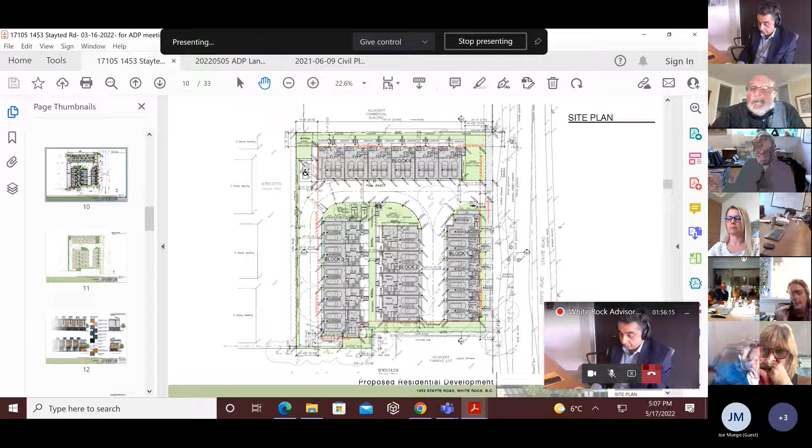My own view, if I can say, because the playground is to some extent related to the setback. To me, the setback, because if it goes to the red line, there's no playground there. The question I have goes back, and I don't know if it's too simplistic, is what's the space between the edge of the road and the building? And if we had that, then I would have a lot more understanding about what might happen in that right of way and what might happen in terms of the playground.

Anybody have a suggestion? A motion? Can I make a motion then? If people think this is a relevant question, I would simply move that we defer this until we have more of an understanding about what happens with respect to the widening of the road. But if that's not going to change anybody, then there's no point in doing that.

Is that the motion then, Phil? Well, I'm throwing it out as a potential motion. I'd like to, but somebody else would have to make a motion otherwise.

Well, if I may, it's a fairly significant issue that's outside of our purview. I think that if we vote on the merits of the architecture and site planning generally, and then have it noted in the minutes that we had some strong discussion about our concerns about Stayte Road, and leave it to mayor and council to make the decision. It's not really ours to make, I don't think. From an architectural perspective, yeah, it's not the greatest, but there's too many unknowns, and we're not here to solve those problems or to keep punting back a proponent over and over again. At some point, it reminds me of that other project that kept coming back. At some point, we just got to let it go and let mayor and council do what they need to do.